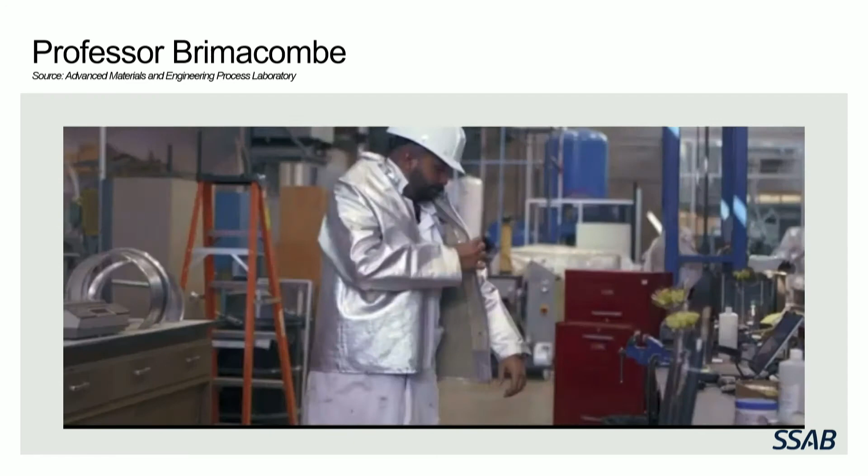Keith Brimacombe left an indelible impact on the University of British Columbia, the people he mentored, and the industry he studied. He was, I would say, a visionary, a pioneer, with an incredible ability to understand how to connect very disparate pieces of information to provide insight that nobody had actually thought about. Keith was a little bit unique as a visionary, as he actually looked at the ground we were standing on. He worked with existing industries, he worked with existing technologies, and it was all about improving our understanding of those technologies.

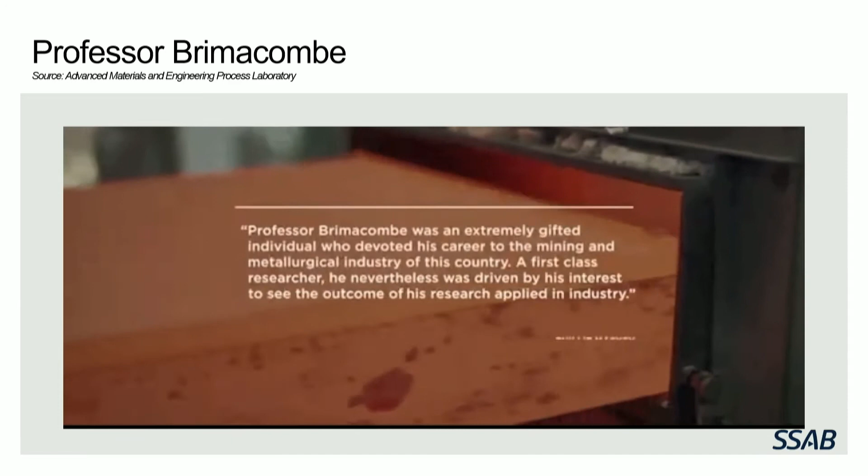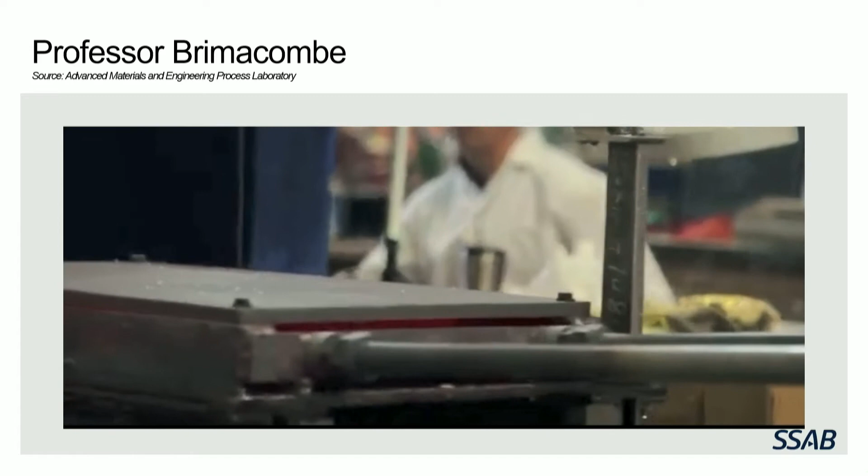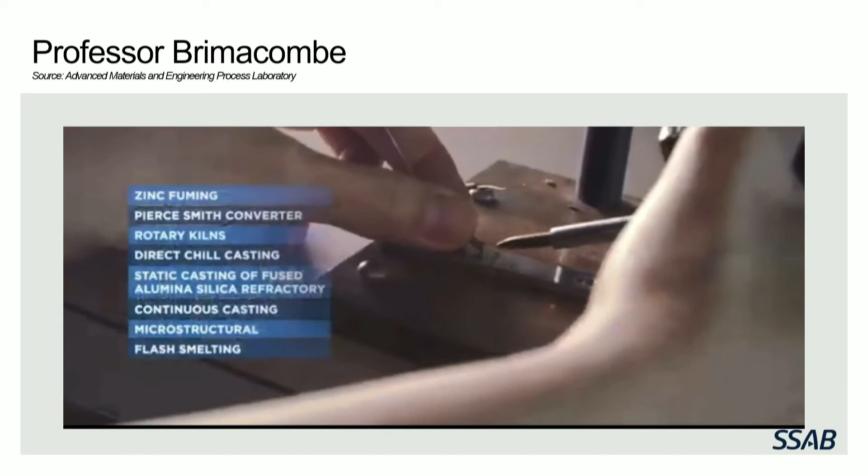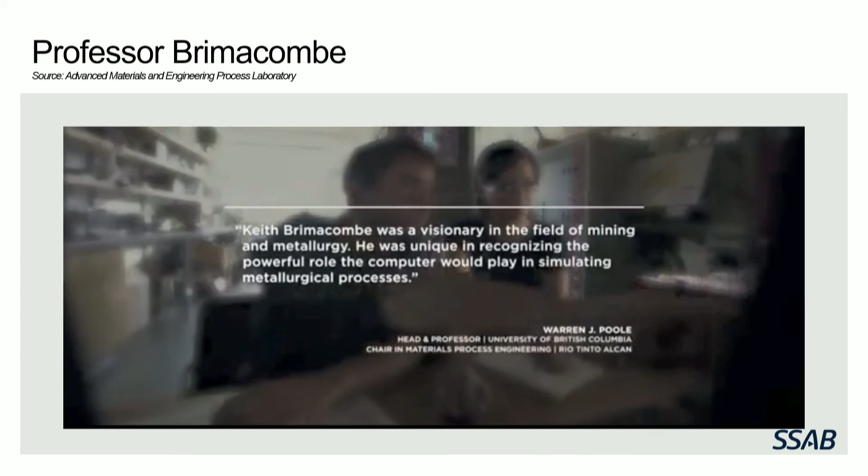Where some researchers will be happy making a major contribution in one area, Keith Brimacombe was dedicated to researching many ferrous and non-ferrous processes. The remarkable thing is the areas I worked on with him were two of probably 10 areas that he was working on simultaneously. Just a remarkable intellect and capability. Many of the improvements and advances made by Keith involved processes key to the mining industry, like his work with zinc fuming and the Pierce-Smith converter. It was his approach to studying these areas that made him unique. No one in the world had ever done that until he came along and really demonstrated how you could do it most effectively.

Probably his biggest contribution is in the computer modeling of continuous casting processes. And by doing that, he really greatly enhanced our understanding of how that process operates. Professor Brimacombe possessed a rare combination of intellect, energy, and engaging personality. He was a great scientist, researcher, and innovator whose work had significant impact in academia and industry, and it still does.

In my lecture this morning, it is my hope that the examples I will give on the applications of physics-based modeling and artificial intelligence for smart manufacturing are consistent with some of the work that he did.

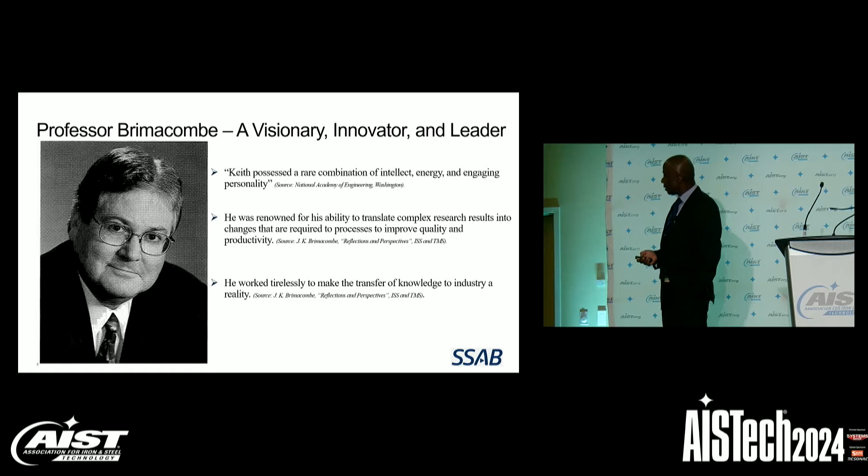The industrial revolution started out in the third quarter of the 18th century with the introduction of steam and water power for mechanization of manufacturing. This resulted in agricultural boom, population growth, creation of new cities, and urbanization. By the first quarter of the 20th century, the water and steam power was replaced with electricity, and this resulted in further population growth, mass production of food, clothes, and goods, and innovations in transportation, medicine, and weaponry.

And by the third quarter of the 20th century, revolution in computer technology resulted in automation of major industrial processes. In the iron and steel industry, computer technology empowered us to improve the production efficiency and the quality of the product that we make. And now, as the first quarter of the 21st century draws to an end, the availability of massive computing power resources is opening up a new landscape for industries to further improve production efficiency and product quality.

The history of artificial intelligence started out in the 1940s with the introduction of neural networks for modeling. AI did not gain any popularity until the 80s and 90s when successful cases of its applications were reported, including a computer program called Deep Blue that beat the world chess champion. Then in 2009, the first self-driving car was created. And then in 2011 through 2014, a few personal assistants such as Siri, Google Now, Cortana, and Alexa were created. And now artificial intelligence is opening up a new frontier of research for rapid innovations in different industries.

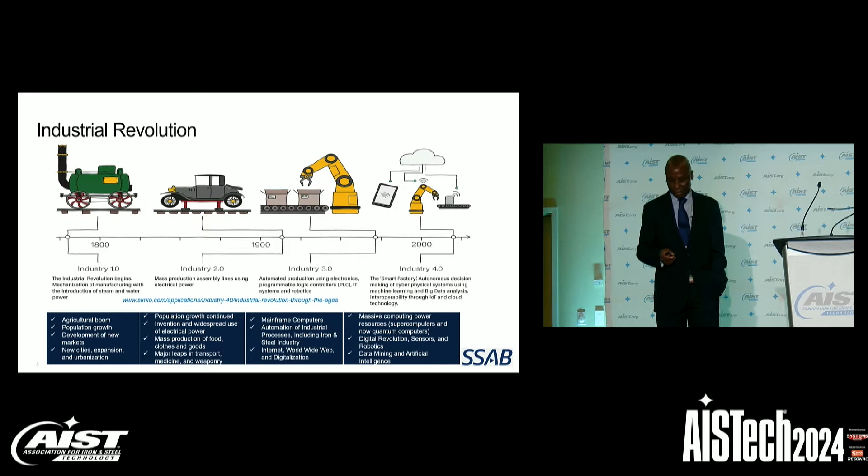In the steel industry, the safety and health of our employees have always been at the forefront of our operation. And now with the availability of AI and robotics, we are further enhancing this opportunity to ensure that we don't put employees in harm's way. But let's watch a short video clip about the early state of concern of safety.

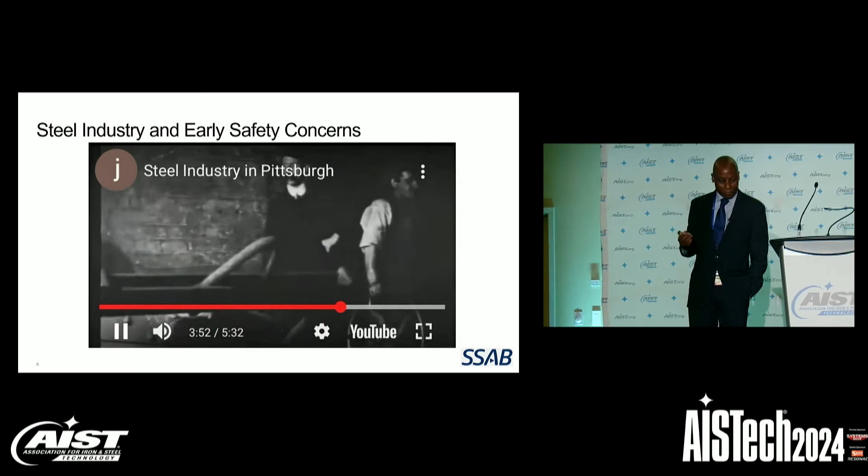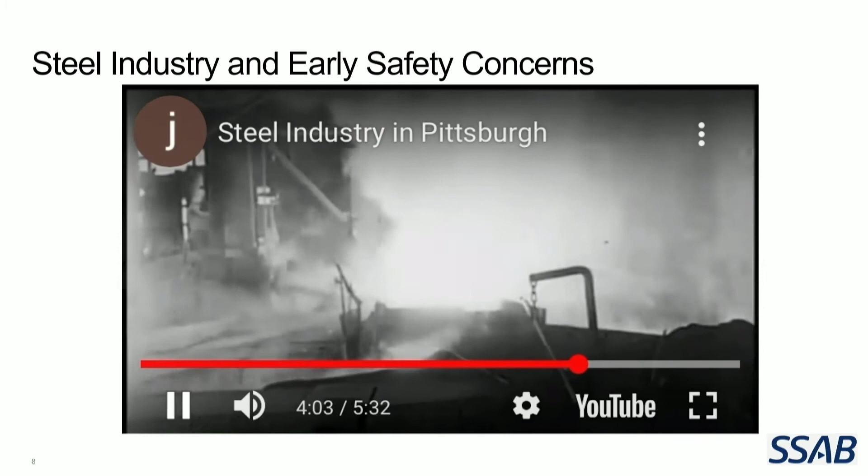Many of the men at Homestead work 7-day weeks, holding down 12-hour shifts. Every 2 weeks, they'd do a turn, working 24 hours straight. The majority earn less than $2.50 a day.

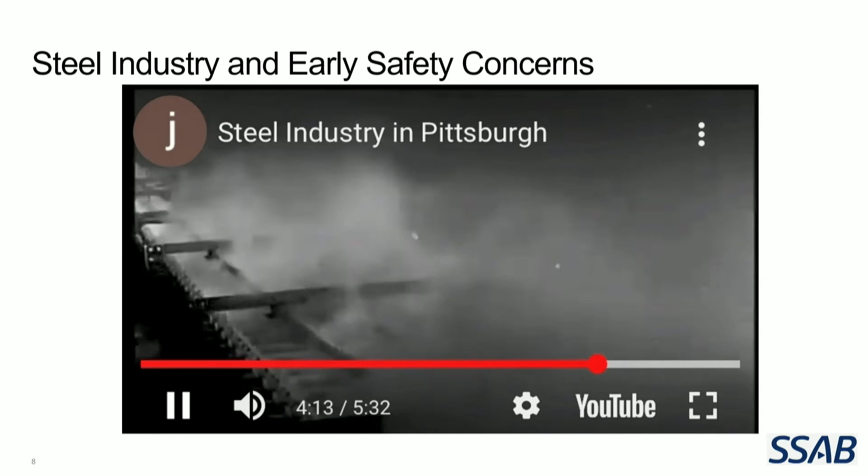This was a place where the furnaces were working 24 hours a day. The sky would be lit up by the light of the furnaces. Pittsburgh in the 19th century was compared to hell more often than any other city because of how dark and obscure the sky was. And walking into a steel mill in that era would have been a staggering experience. It was like walking into the jaws of hell itself.

You had these vast furnaces, superheated molten metal being poured, splattering. It was like the 4th of July. Molten metal flying everywhere. It was majestic, it was awe-inspiring, and also very dangerous at the same time. And also tremendously difficult work. People talked about sweating so much that their shoes would be squishing full of water from their own perspiration, that inside of an hour on the line, it would be as if they were walking through a swamp.

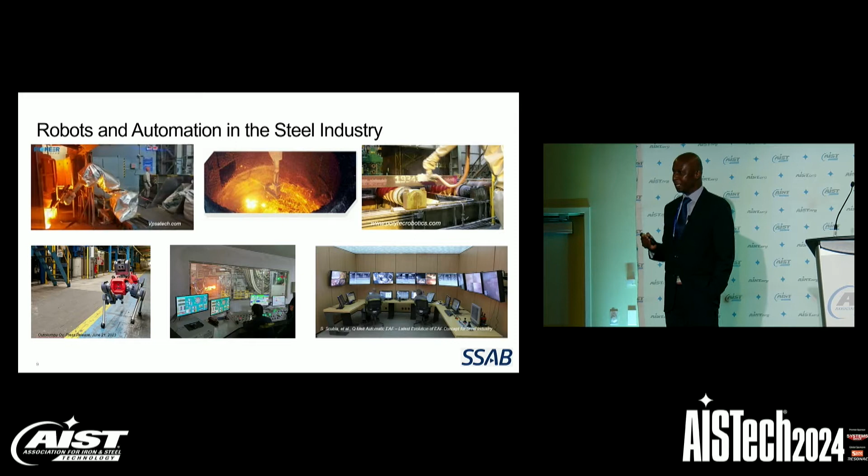With AI, digital evolution, and computer technology, it is no longer necessary to install glass windows in the pulpits of operators. It is actually important to locate the pulpit far away from the electrical furnaces to make sure that employees are not in danger. But there are opportunities where physics-based models and AI can be combined to optimize processes, improve quality, and product performance. The examples I will give are based on the electric arc furnace route of steelmaking.

The electric arc furnace steelmaking process is an energy-intensive process. 65% of the energy required to melt scrap comes from electricity, and the remainder comes from various chemical reactions. The temperature of the arc ranges from 2,800 degrees C to 19,000 degrees C. As a comparison, the temperature of the surface of the sun is only 5,500 degrees C. The sound of the arc as it melts down the scrap is akin to that of a thunderstorm.

The process is multiphysics, involving chemical reactions in different phases that are in thermodynamic pseudo-equilibrium with each other. All of this creates an environment that is harsh, aggressive, and corrosive. Hence, it is impossible to continuously measure the temperature of the bath during the scrap melting. A decision on when to make an intermittent temperature measurement is based on the judgment and the experience of the operators. Hence, this can lead to inefficiency in the process.

So because of that, as a solution, we decided to develop an energy and material balance model to help the operators understand the state of scrap melting in the furnace. The energy inputs and outputs were systematically identified and quantified, resulting in a complex equation for predicting the temperature of the bath during scrap melting. The red curves that you are seeing here are the predicted temperature of the bath during scrap melting. As you can see, they are in good agreement with the measured temperatures that are represented by the open circles.

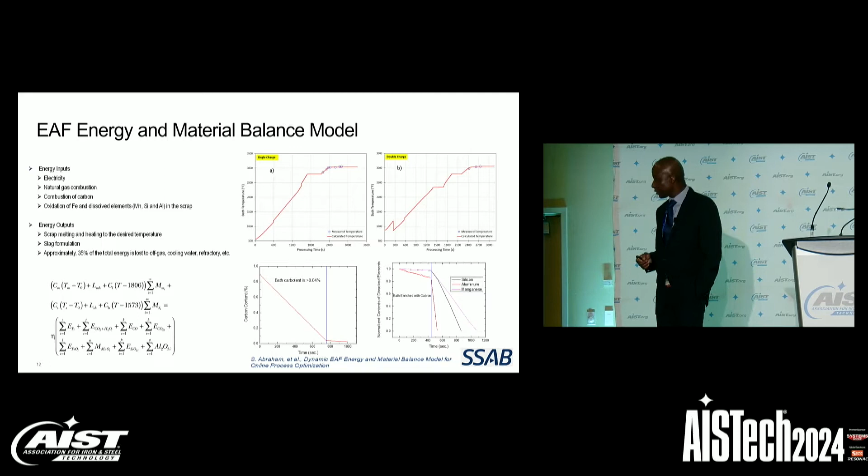In our model, we incorporated a sub-model for oxidation kinetics to predict the chemistry of the bath during the scrap melting. So our model can predict carbon, aluminum, silicon, and manganese content of the bath. As a result, we have a comprehensive model that provides guidelines to the operators on the state of scrap melting in the furnace. Optimal slag chemistry and good slag foaming is very important for the efficient operation of the electric arc furnace. If the slag doesn't foam well, the arc is exposed, and the roof and the wall of the furnace can be damaged from the intense heat radiation from the arc.

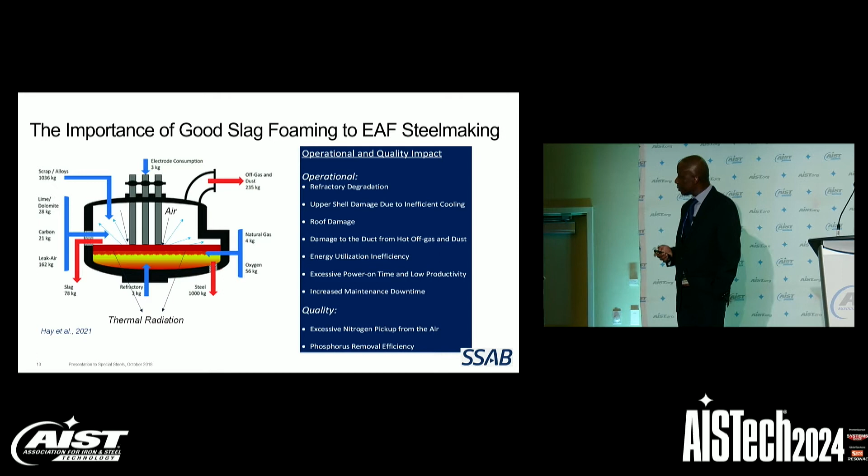Now, if the slag does foam well, then the slag completely engulfs the arc, maximizing heat transfer onto the scrap. And also, this process minimizes nitrogen dissolution from the air into the steel, which is good for the quality of the steel. But operators do not know exactly what the chemical composition of the slag is during the scrap melting. So to provide a solution to this, we decided to develop a model for predicting slag chemistry.

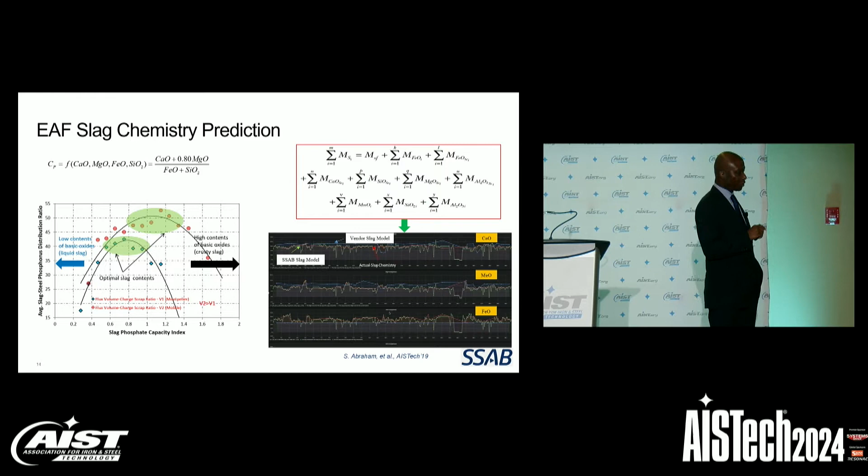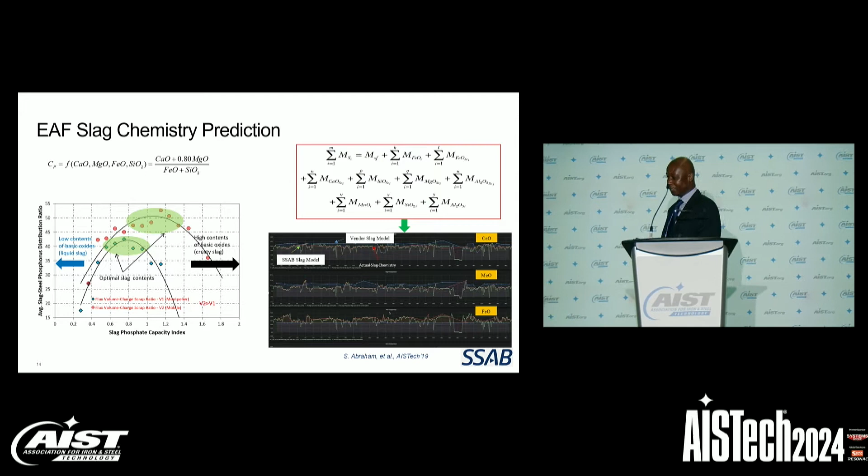By studying the historical data on slag composition and steel chemistry, we determined that the capacity of the slag to absorb phosphorus from the steel is highest when its concentration is in the optimal range. Using mass balance analysis of the fluxes that were added to the electric arc furnace during scrap melting, and in cooperation with our sub-model on oxidation kinetics, we developed a slag model to predict the slag chemistry. The green curve represents the predicted slag chemistry, and the red curve represents the measured slag chemistry. As you can see, there is very good agreement between the predicted and the measured slag chemistry. Now, operators can use the model as a reference to adjust the slag chemistry as appropriate.

After melting, the steel is tapped from the furnace into the ladle for subsequent processing. During tapping, it is very important to minimize slag carryover from the electric arc furnace into the ladle. It is equally important to ensure that you have adequate heel in the furnace for subsequent scrap melting. There are two ways of doing this.

One is the use of load cells to measure the weight of the steel in the ladle and in the EAF during tapping. Needless to say, this is a precise technique. But under the harsh environment of electric arc steel melting process, load cells frequently break down. Hence, they are maintenance intensive and costly.

The second method is using the slag detection system coupled with eyeballing of the level of the steel in the ladle. This method is not precise. It doesn't give you exact weight of steel in the ladle or in the electric arc furnace. Hence, the heel can quickly run out of control as shown on this chart. So inconsistent heel in the furnace can lead to overcharging of scrap in the electrical furnace, undertapping of liquid steel into the ladle, EAF overload, poor scrap inventory management, and poor yield.

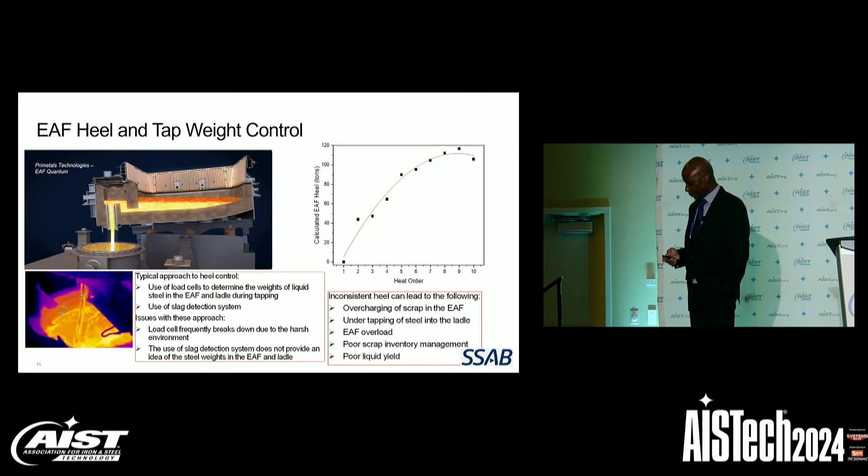As a solution, we decided to develop a model to predict tap weight and heel in the electrical furnace. So our approach is actually to measure the change in ladle volume during its campaign. The ladle does change its volume during this campaign because the refractory wears out with time. So by looking at historical data on refractory wear out, we developed a mechanism for measuring the profile of refractory wear in the ladle. Hence, we're able to calculate the ladle volume at any given time.

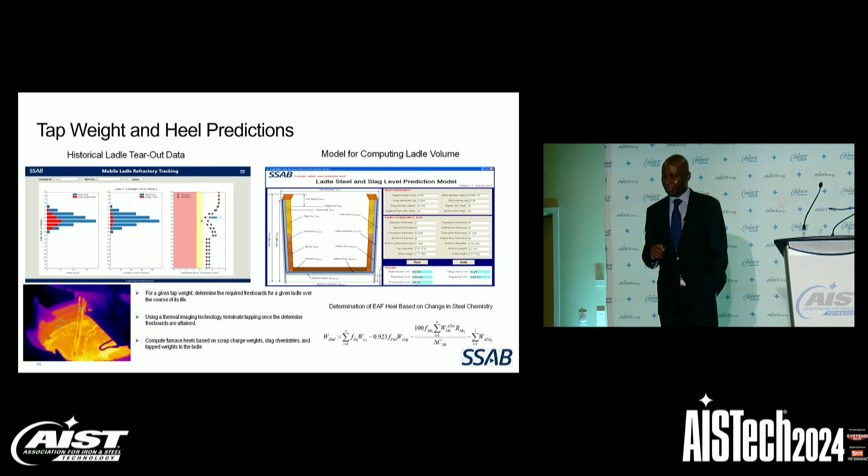So when a ladle is designated for tapping and a tap weight is specified, our model determines the freeboard in the ladle. And then you can now use a thermal imager to monitor the temperature of the refractory in the freeboard region. And then as the level of the steel is rising and when it contacts the freeboard region, the change in temperature can be used to terminate tapping, leading to consistent heel control during scrap melting in the furnace.

So now, after tapping, the ladle is sent to the ladle metallurgy station for refining. Refining is the most intense of all steelmaking process steps. The reason is that the operators have to perform multiple tasks within a very short period of time. The operators have to ensure that they add adequate amount of deoxidizers and fluxes for efficient desulfurization and deoxidation.

They have to ensure periodic addition of multiple alloys into the ladle as they sample the steel to test the chemistry to ensure that the chemistry is within the specification that is required for that particular grade. They have to provide adequate heating to the bath to make sure that the ladle is sent to the caster at the required temperature. They have to ensure good argon stirring in the ladle to ensure that we have chemical and thermal homogeneity. And they also have to ensure that in that process, they enhance inclusion removal before the ladle is sent to the caster.

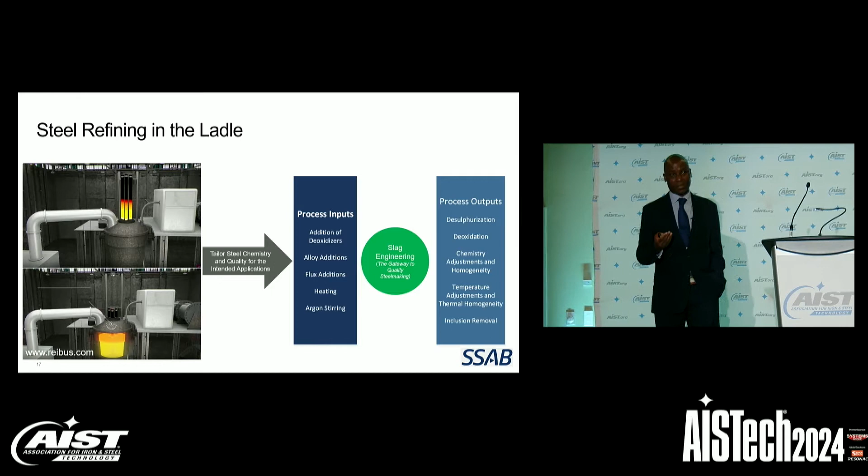But slag engineering is very key to the quality of the steel at the end of the refining process. An engineered slag has to have high sulfide capacity, low interfacial tension, and good fluidity. All of these properties depend on the composition of the slag. Unlike the steel, it is operationally inefficient to sample the slag for chemical analysis during the refining of steel in the ladle. But fortunately, the slag does change color as its composition changes. And operators rely on this change in color to determine whether they have a good slag or not. But this doesn't always work the way we want it to.

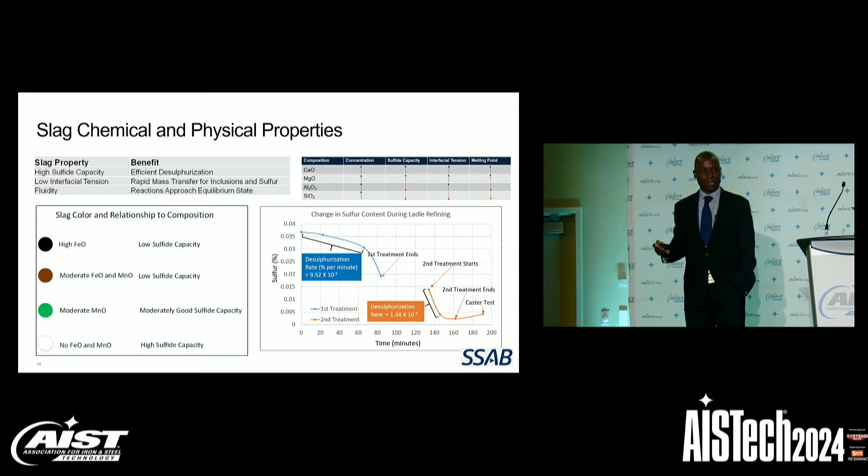What we're showing here on the chart is evolution of sulfur during refining of the steel at the ladle metallurgy station. For the first 60 minutes of refining, the sulfur removal rate was very low. The operators had to rake off the original slag, make new slag, before they had rapid desulfurization in that particular heat. But as you can see, that heat took us almost 200 minutes to process at the ladle metallurgy station, compared to typical 30 to 45 minutes of refining. So needless to say, this resulted in operational delays and productivity loss.

So as a solution, we decided to develop a model to predict slag chemistry during refining in the ladle.

For a model to work, we have to identify and quantify oxides from different sources that make up the slag. For example, the EAF slag carryover was calculated based on the phosphorus change from tap chemistry to the first LMF test. The alumina that is formed is calculated based on the oxygen potential of the liquid steel and the oxygen from the air that is entrained.

Then we also consider the amount of fluxes and the chemistry of fluxes that were added during refining in the ladle. Then we look at historical data between the slag composition and the steel to understand how the slag composition affects sulfur removal. With that data, we're able to group the slag into various categories. We have fluid slag, high sulfide capacity; semi-crusty slag, low sulfide capacity; semi-gummy slag, low sulfide capacity; and so on.

And by normalizing the concentration of the slags, we are able to represent them in the ternary plot of calcium oxide, MgO, and alumina. So the operators can see the condition of their slag during refining in the ladle. Now, what you are seeing on the right here, the predicted slag condition, is that of the heat that I reported on the previous slide that experienced difficulty desulfurizing. Our model was able to determine that the slag is semi-crusty and has low sulfide capacity.

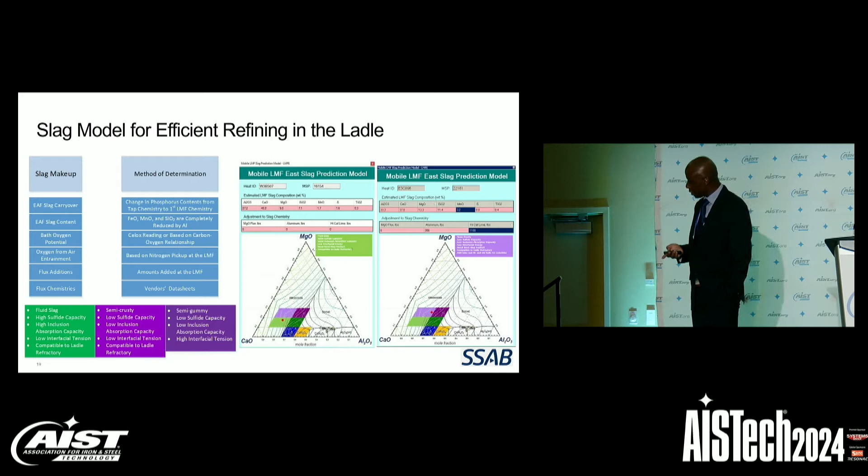So one of the tasks that the operators have to perform during refining at the ladle metallurgy station is to ensure that we reduce the population densities of non-metallic inclusions before they send the ladle to the caster for casting. Non-metallic inclusions can be very detrimental to the mechanical properties of steel because of the disparity between elastic and thermal properties of steel and non-metallic inclusions. So properties such as resistance to fatigue, toughness, and resistance to hydrogen-induced cracking can be degraded because of the presence of a significant amount of inclusions in the steel.

But fortunately, solid non-metallic inclusions tend to float up to the slag-steel interface where they get absorbed by the slag. This behavior is described by the Stokes equation, which shows that the upward velocity of solid non-metallic inclusions is directly proportional to the square of the radius. So if you take two alumina inclusions, one that is 100 micron in diameter and the other 10 micron in diameter, the 100 micron one will float upward into the steel-slag interface in less than 4 minutes. The 10 micron inclusion will float up into the slag-metal interface in about 400 minutes.

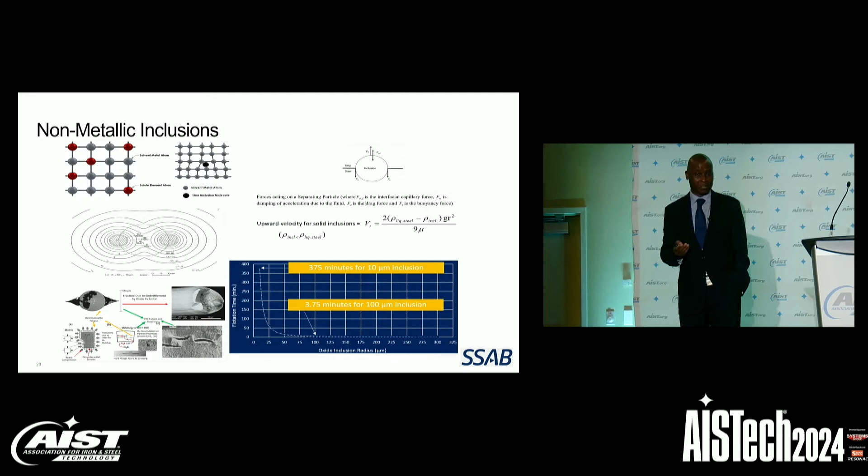But the 10 micron inclusions can be very detrimental to the mechanical properties if they are present in large population. But we don't have 375 minutes to waste. Otherwise, we will not be in the business of steel making. Some other researchers have done work and shown that argon bubbling can enhance flotation of non-metallic inclusions during ladle refining.

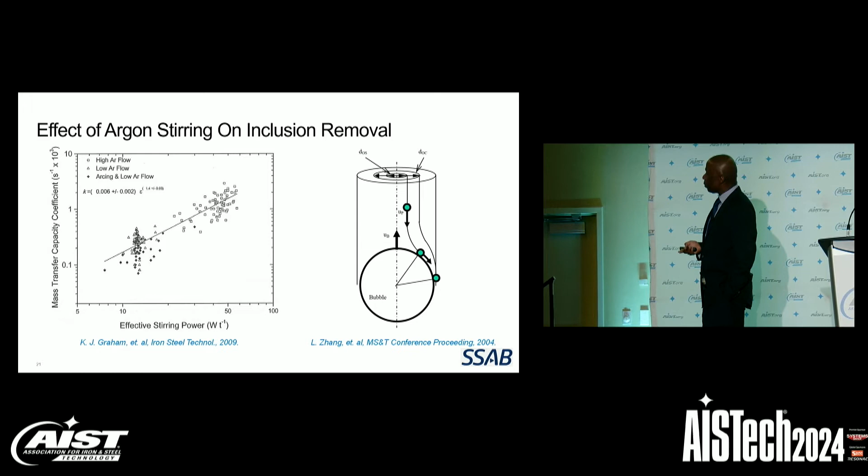The reason for that is that the size of the argon bubble is significantly larger than the size of non-metallic inclusions. And also, the argon bubbles are significantly lighter than non-metallic inclusions. So the upward velocity is very high. So if inclusions get attached to those bubbles, that will enhance their flotation from the liquid into the slag-metal interface. But we decided to investigate this phenomenon further by doing experiments.

In one of our experiments, we allowed two ladles to idle for some time after the steel had been killed. The one ladle was idle for 97 minutes with no alloy addition and no argon stirring. And the second ladle was idle for 57 minutes, but with 10 SCFM argon stirring. We sampled the steel before the idle time and after the idle time for non-metallic inclusions.

And what we found is that the ladle that was idle for 97 minutes with no argon stirring has significant decreases in the population densities of non-metallic inclusions, whereas the ladle that was idle for 57 minutes and stirred at 10 SCFM with argon has significant increases in its inclusion population density. So we concluded that the argon stirring probably perturbed the flotation of non-metallic inclusions from the steel.

Now we are in a movie, right? I can't see anybody.

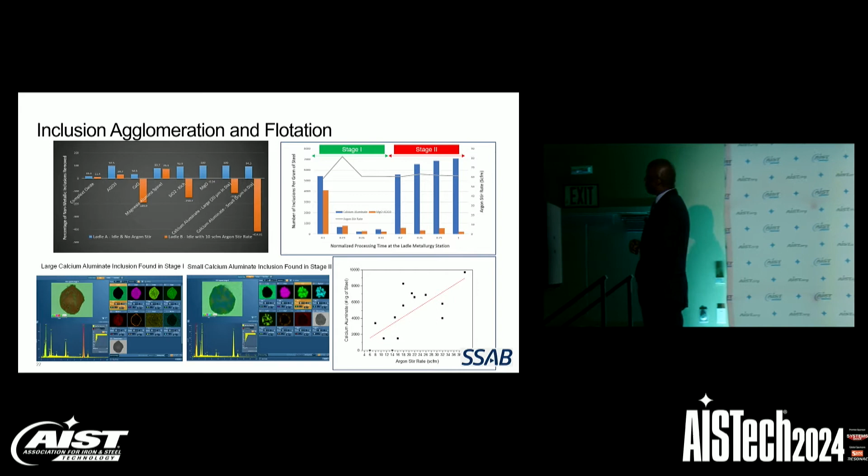And then in our second experiment, we had a ladle of steel, and we sampled the steel from the beginning of refining to the end of refining. And we found that the refining process can be divided into two stages. Stage one is where we had a very rapid decline in the population densities of non-metallic inclusions. And stage two, where we have significant, gradual increases in non-metallic inclusions. We also found that the inclusions in stage one were significantly larger in size compared to the inclusions in stage two.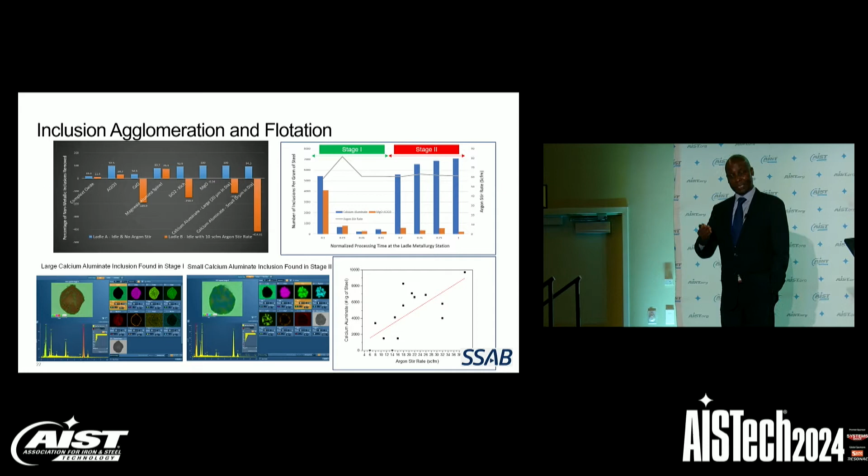So what we concluded is that, in the first stage, when we have high oxygen potential and the slag is not fluid, we form very large inclusions that quickly flow up to the slag-steel interface, where they get absorbed by the slag. Then in the second stage, the slag is now fluid. The oxygen potential is very low. We form small inclusions. Small inclusions are perturbed by the argon stirring. They can float up quickly.

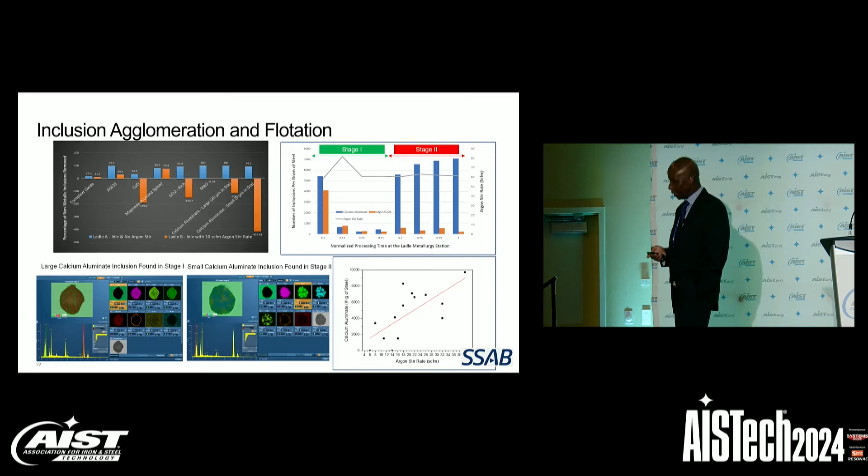And not only that, because the slag is fluid, if you are stirring aggressively, you entrain slag particles back into the steel. So what we found is that, in stage two, the population density of slag particles that is entrained back into the steel is directly proportional to the argon stirring rate. But overall, we found that, in aluminum-killed steel, pure alumina is not the predominant inclusion in the steel. Most of the alumina is tied up as calcium aluminate, magnesium aluminate, and complex oxides.

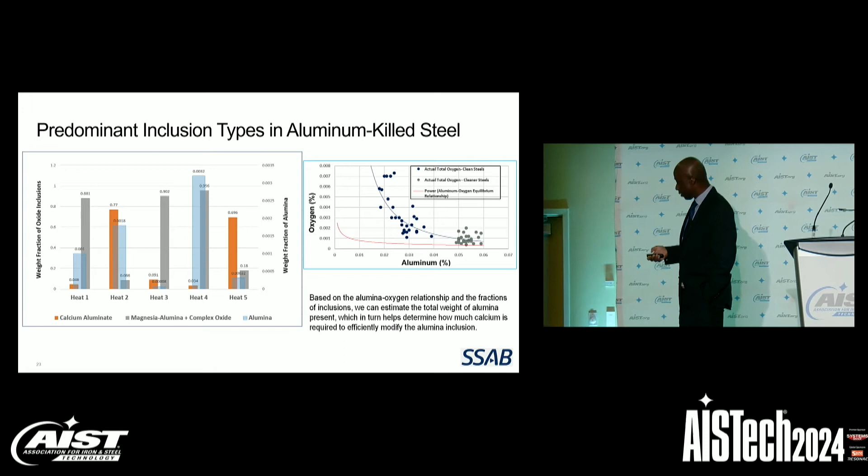However, we found that, with increasing aluminum in the steel, the oxygen potential tends to decline. So using this relationship, we can actually calculate how much calcium is required. You remember that 10 micron size inclusions don't float out quickly. So we can determine how much calcium to add to modify those residual inclusions, to make sure that they don't result in operational problems or cause negative impact on the mechanical properties. But if we also know the sulfur content of the steel, we can calculate how much calcium is required to completely modify the oxide and the sulfide inclusions.

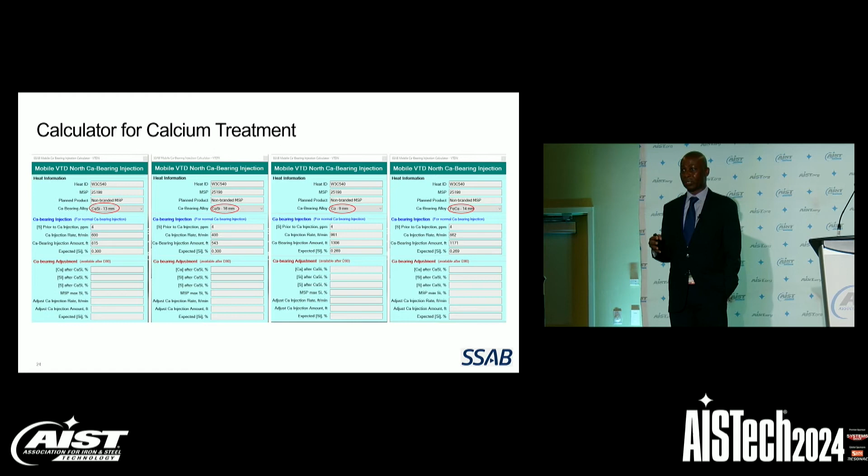So we have a calculator that, at the end of the refining process, we can use to determine for any calcium-bearing agent how much of that material should be added to ensure that the sulfide and the alumina inclusions are efficiently modified. And what we found is that the modification efficiency of sulfides is related to the calcium to sulfur ratio, and the modification efficiency of alumina inclusions is related to the calcium to oxygen ratio.

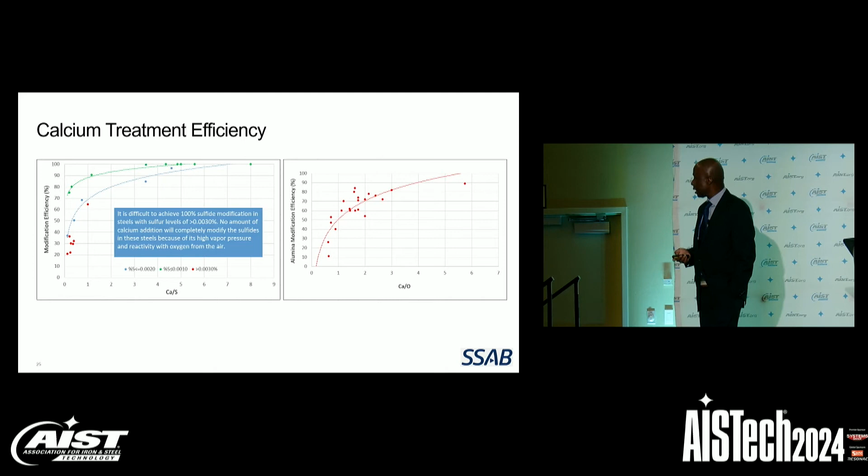We also found that if the sulfur content is higher than 30 ppm, it is impossible to completely modify the sulfide inclusions. So at the end of refining, once refining is complete, the ladle is sent to the caster for casting. At the caster, the steel flows from the ladle into the tundish and then into the mold, where it begins to solidify. As the strand solidifies, it is gradually withdrawn away from the mold. The withdrawal speed of the strand should be consistent with the flow of liquid steel from the ladle into the tundish and from the tundish into the mold.

But there are two incidents that can interfere with this flow dynamic. One is in the tundish: the stopper rod that is used to control the flow from the tundish into the mold can have severe erosion at the tip, leading to uncontrolled flow from the tundish into the mold. And the SEN that distributes the flow in a certain pattern in the mold can be clogged, choking off the flow from the tundish into the mold. By looking at the historical data, we found that these two events are related to the calcium content after calcium treatment in the ladle, and also to the amount of calcium fading that occurs during continuous casting.

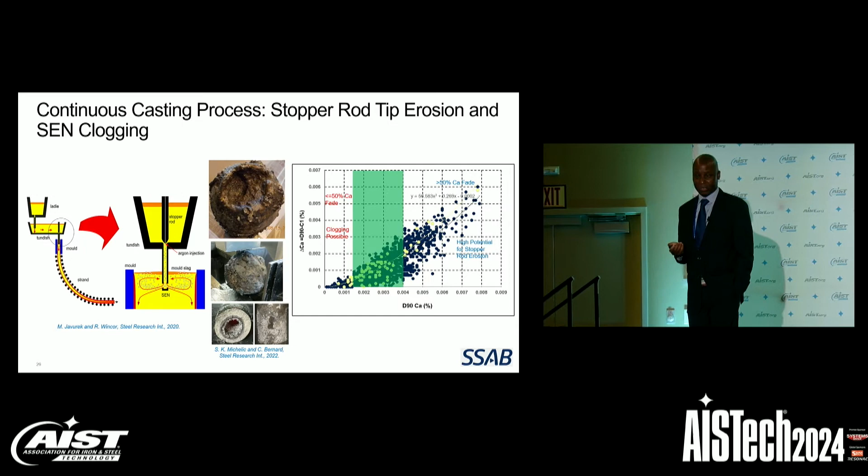That is, if the calcium content resides to the right of the green zone, there is high potential for stopper rod erosion. And if the calcium content is to the left of the green zone, then there is high potential for SEN clogging. We identified other process variables that can affect stopper rod erosion or SEN clogging. And then we decided to use a cluster analysis algorithm, a type of machine learning algorithm, to predict the stopper rod behavior. Based on historical data, each process variable is classified into clusters with tight boundary conditions. So this allows us to identify a combination of process variables that will lead to either stopper rod erosion or SEN clogging.

For example, if you take a heat that ended up with 10 ppm calcium, calcium to sulfur ratio of about 3, an aluminum addition before calcium treatment of about 100 pounds, an aluminum addition after calcium treatment of about 100 pounds, and then with argon rinse time of about 2 minutes. This combination of process variables will lead to neutral position, i.e. no stopper rod erosion, no SEN clogging.

When you compare it to another heat that ended up with a calcium of greater than 15 ppm and calcium to sulfur ratio of about 4, aluminum addition before calcium treatment of 150 pounds, argon rinse time of about 3 to 5 minutes, aluminum addition after calcium treatment of about 100 pounds, and argon rinse time of about 1 minute. This combination of process variables will lead to severe stopper rod erosion.

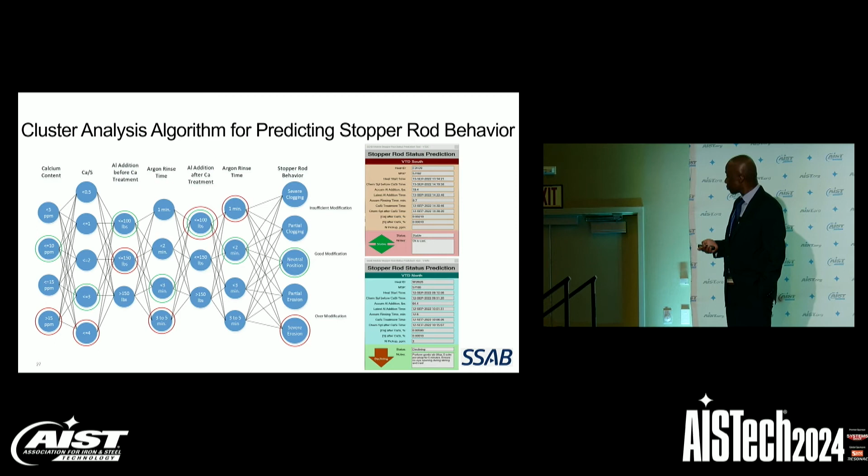So temperature of the liquid steel during casting is very important to the operational efficiency of casting and to the surface and internal quality of the as-cast product. Temperature is measured in the tundish either with a continuous temperature measurement sensor or intermittently with a temperature probe. Continuous temperature measurement sensor, you learned this already, is maintenance intensive and costly. Intermittent temperature measurement is not good for process optimization and control.

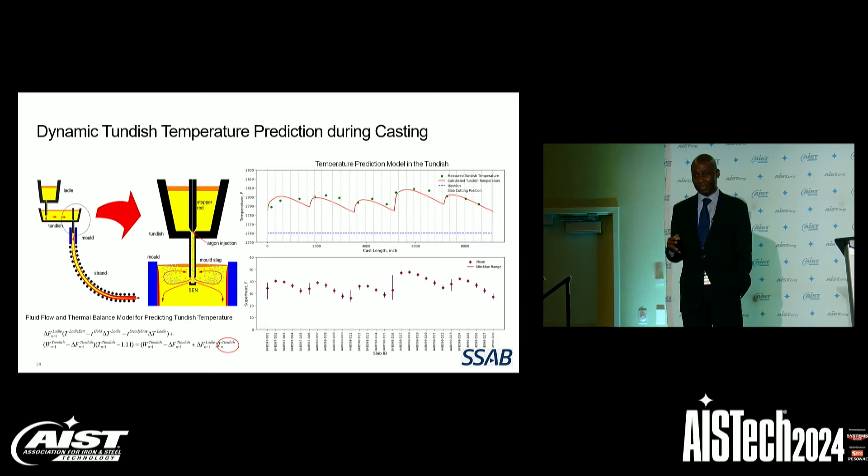So what is neat about this model is that for all slabs that are cast in the sequence, we can map out the superheat of all the slabs and then correlate that to the surface and internal quality, and also use that to optimize shipping temperature from the LMF to the caster.

So of everything that can happen during the continuous casting, none is more devastating than strand breakouts. There are many reasons why strand breakouts occur, but the one I want to focus on is the hydrogen-nitrogen-related strand breakout. So during solidification, the solubility of hydrogen and nitrogen decreases. So as the shell is solidifying in the mold, we have molecules of hydrogen and nitrogen that are coming out of the shell. And they can be trapped in between the shell and the mold wall, decreasing the heat transfer from the shell onto the mold wall.

So at the exit of the mold, the shell can be so thin that it cannot withstand the ferrostatic pressure of the liquid inside it. So this creates potential for breakout. So by looking at historical data on hydrogen-related breakouts, we found that with every 1 ppm increase in hydrogen, you have to decrease the nitrogen by 20 ppm to avoid the potential for breakout.

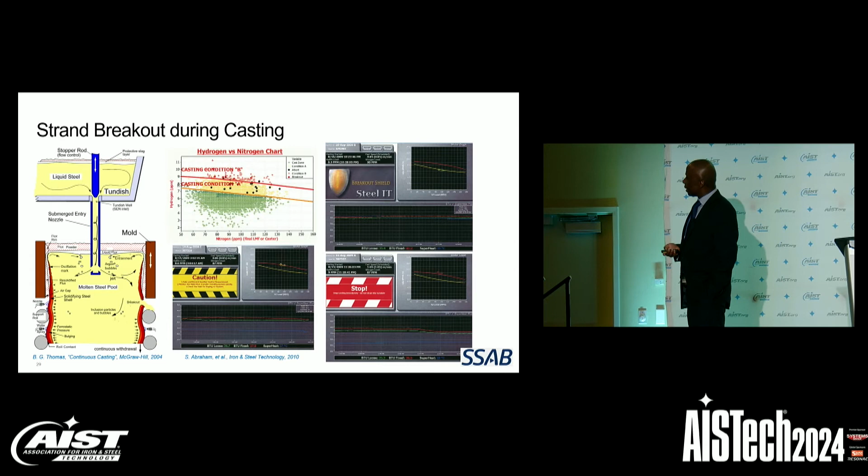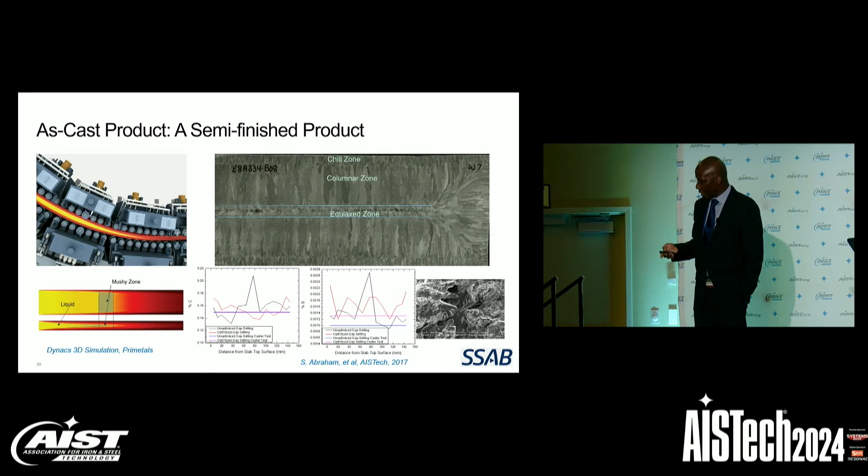So the as-cast product is referred to as semi-finished product, and it is not good for most applications. The reason is that the chemistry and the microstructure is not homogeneous throughout the thickness, and it is not uncommon to see defects such as centerline segregation, shrinkage cavities, and pores and voids in the center. The chemistry can be homogenized through reheating in the reheat furnace, and the microstructure can be refined, and the centerline defects can be healed through thermomechanical deformation.

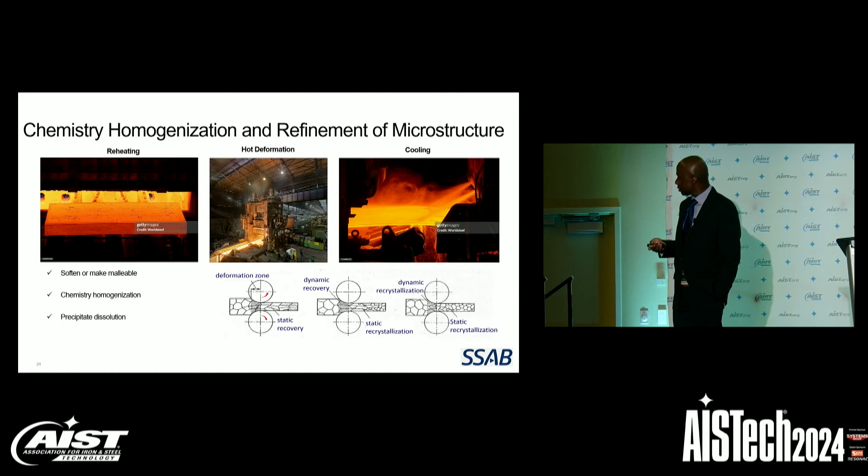During thermomechanical deformation, many microscopic phenomena such as precipitation, phase transformation, recrystallization, recovery, dislocation, etc. occur. These microscopic phenomena, they interact in a complex manner with each other and with macroscopic factors such as chemistry, temperature change, strain rate, number of passes, interpass time, etc., to influence the final microstructure and mechanical properties of steel.

We can rely on CCT diagram or TTT diagram to predict the microstructure and maybe some properties of certain steel grades. But developing physics-based model that can precisely determine microstructure and mechanical properties is very difficult because of the complex synergistic effects that the microscopic phenomena have with each other and with the macroscopic factors.

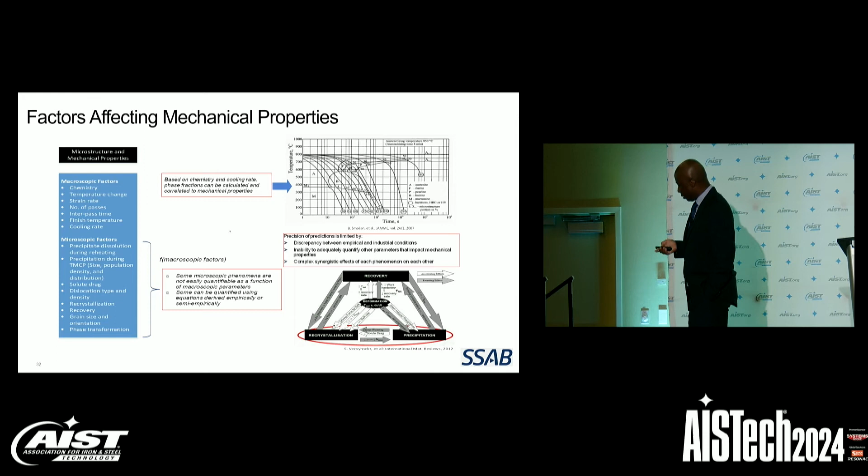But nevertheless, Hodgson and Gibbs developed a physics-based model for predicting the microstructure and mechanical properties of carbon manganese hot rolled steel. In their model, they considered microscopic phenomena along with their synergistic effect, but with huge assumptions. Their model is intended to predict microstructure and mechanical properties for carbon manganese steel where ferrite is the predominant microstructure. So hence, accurate determination of ferrite grain size is very important to the performance of the model.

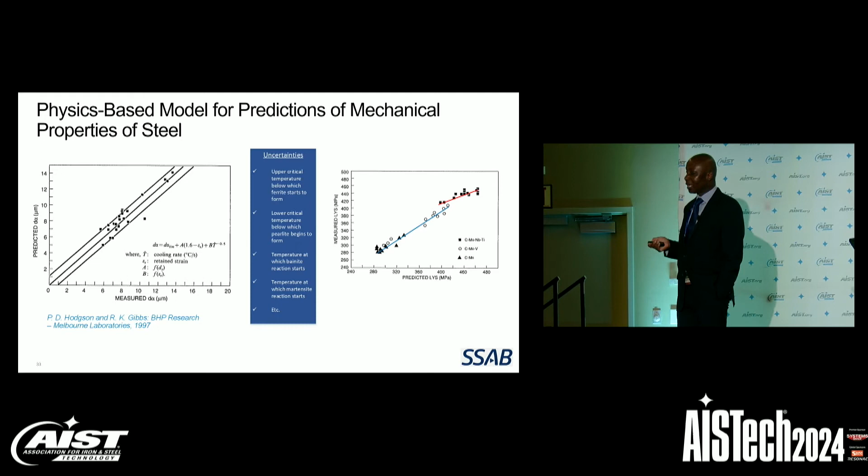So when they applied their model to predict the yield strength for different carbon manganese steel, they found that the prediction is pretty accurate for ordinary carbon manganese steel. Now, when they use the model to predict for carbon manganese steel that has multiple microalloying elements, the accuracy declines

significantly. In the 80s and 90s, there was significant effort undertaken to develop artificial neural network models to predict microstructure and mechanical properties. Artificial neural network models are more accurate and have wider application compared to the physics-based models. However, the problem with artificial neural network models is that as soon as they are applied on a data set outside their training set, the accuracy declines significantly.

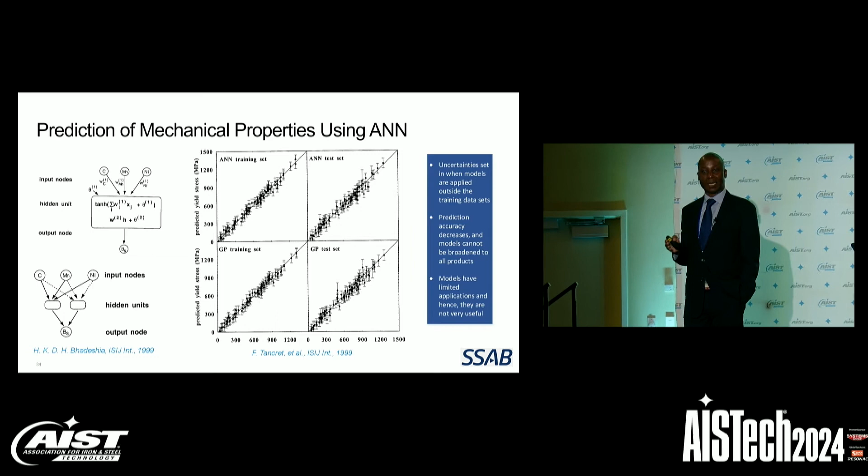So in the steel industry, our approach to product development is actually to rely on the basic knowledge of metallurgy and the experience of the metallurgist. The metallurgists design new products, and they adjust the chemistry and process parameters for all products to make sure that their mechanical properties meet the intended properties. But this is based on trial and error. It is time consuming, and it can generate significant waste.

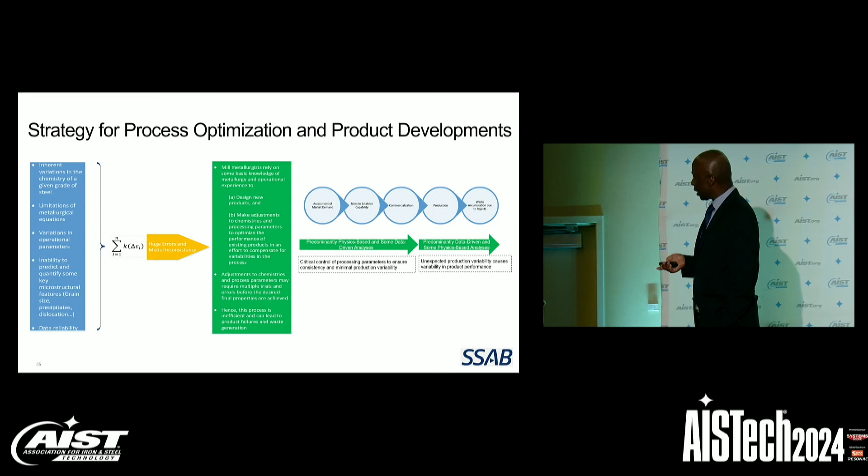The charts that I'm going to show in a second show the relationship between the yield strength and thickness of two grades of steel. On the left is a grade requiring 36,000 psi minimum yield strength. You can see that all of the products there meet this requirement. But if you look at the lighter gauges, they are about 10,000 psi higher than the heavier gauges. Now, on the right is a grade of steel requiring a yield strength minimum of about 65,000 psi. You can see that when you go to heavier gauges, you begin to see products with yield strength that is below the required minimum of 65,000 psi.

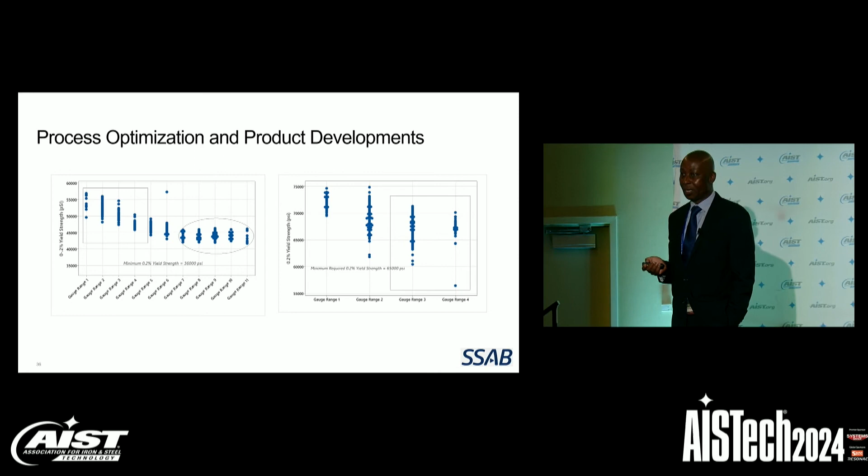So a potential solution to minimizing such waste with respect to product development is to maybe apply a cluster analysis algorithm for product development. For these particular kinds of cluster models, we can identify measurable and known process variables that impact microstructure and mechanical properties. And then based on historical data, classify each process variable into clusters with tight boundary conditions. Each grade, each chemistry type will have its own cluster model. This way, we can identify a combination of process variables that will lead to certain mechanical properties. Such a model can be applied online for troubleshooting and prediction of microstructure. It can be used offline for design of new products.

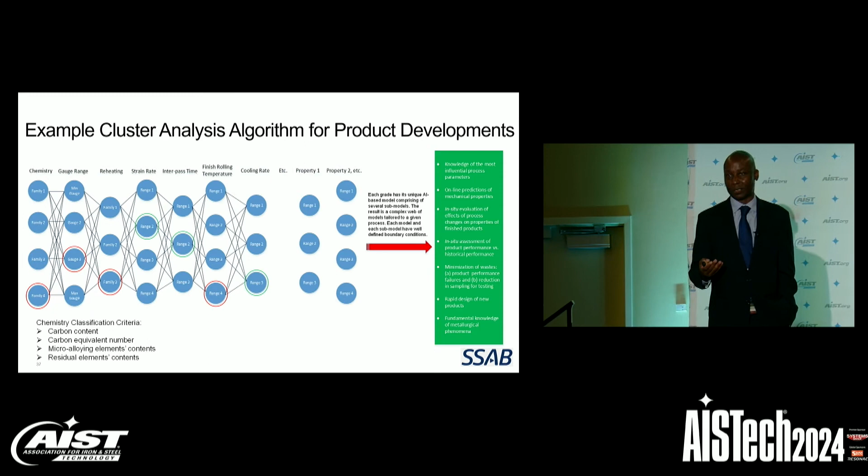Now, before I end my lecture, I would like to talk about the potential or the perceived danger that AI poses to our society. I think you all remember this. In November of 2022, when ChatGPT was launched, it created a significant hype in society. Everybody was worried that AI is going to take their job away. And if you listen to the concern that people have, you will think aliens have finally landed on our planet. And our existence as we know it is about to end.

But in her article entitled Me, Myself, and AI, Alison Whiting said that AI will not replace professionals like doctors, lawyers, and journalists. My daughter is a lawyer, so I support you. They will not replace you, but I'll add, yes, engineers and politicians too. And then she went on to say, those who work with AI will replace those who don't. But essentially what Alison is saying is that AI will not replace us or make us extinct, but it will change the ways we do things. The benefits include better employee safety, health, improved efficiency and productivity, and accelerated decision making.

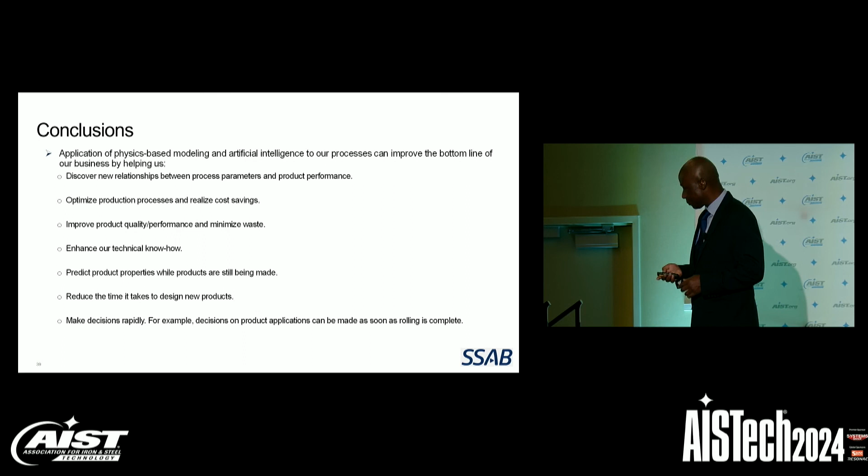There are many, many people that contributed to the lecture I delivered this morning. I would like to acknowledge those people. Ian Dix, a former employee of Nucor who has now retired, Chad Cathcart of Stakehold, and April Badgett of Nucor. Yufeng Wan, who worked with me to develop some of the models presented here today. Xiaojie Chen, who worked with me at the former IPSCO. And then various co-ops and interns from different universities.

SSAB senior management team, Ben Cohen, Tom Turner, Chuck Schmidt, thank you for your support and your vision for our company. Lee Hendon, SSAB America's Communication Director, all other SSAB employees who are here today or are watching online, and my family, my wife, Elena, thank you for your unconditional support and what you've done for our family. And my daughters, Victoria and Jane, I'm very proud of you. And Chris was unable to make it. I thank him anyway. And my brothers, Abraham and Meza, I am grateful to our mom for instilling the value of education in us. And my nephew, Isaac, thank you for coming.

I want to say that AIST has a place for people as young as you, too, so you know. And of course, Ron Ashburn and all the entire staff of AIST, thank you for the opportunity. Thank you.